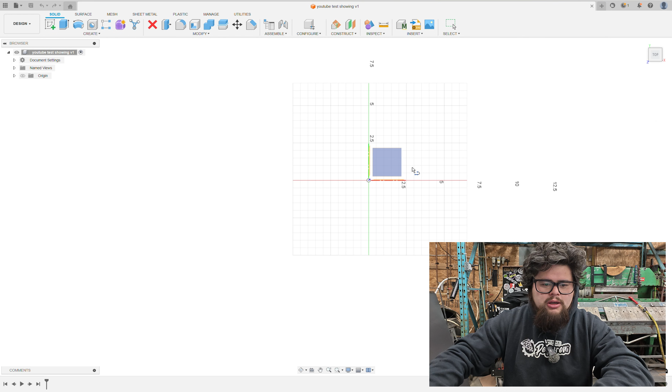Once we have this here, we're gonna just start drawing. Let's start with the basics. You have L, which is your line. That's a straight line, and I'll show you on the computer right now. We're gonna press L, choose the plane you're gonna be working with. Like I said, the top is here, so we're going here. You press L, that's your line tool.

Press it one click, bring it to wherever you want it to go, and press it again, and now you have your line. If you want to dimension the line, you press D. D stands for dimension, because we're dimensioning it. Press D, or go to the top left here and click Sketch Dimension. All the hotkeys or shortcuts I mention are available at the top here. I just use the letter because it's a lot easier.

We're going to press the sketch dimension in the top left corner here, press it on the line. Right now it's 8.45748 inches long. We're just going to make that 5 inches. So you just press 5 and enter, and there it is.

If you have two measurements you don't want to add up, or you want to divide it by 2, you can also put that sequence in the dimension box, which I'll show you right now. You just double click the line you had.

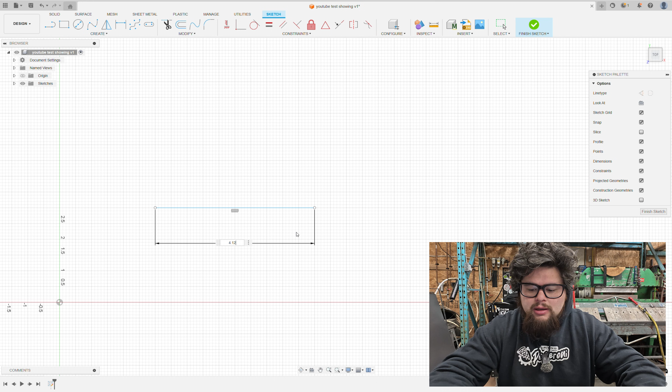You don't have to be in the sketch dimension program. You could just double click the dimension itself, and now it will show up. So if you have two numbers that you don't know what they equal up to, like even in decimals, let's just give an example. We'll go 4.129, and then you just put plus 1.675. So now you get 5.804, and we didn't need to do any external math. You just have two dimensions together, and that adds that.

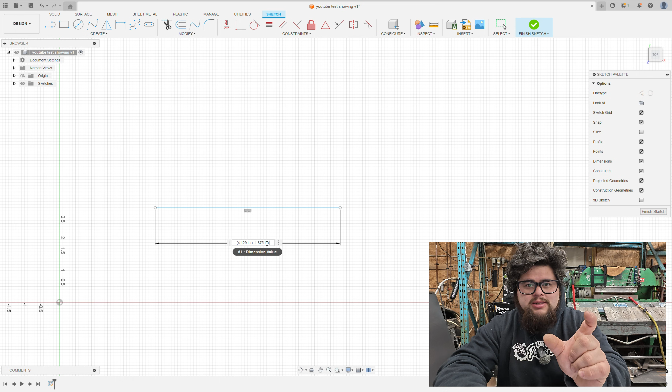We can do it the opposite way too. If we want to cut this in half, you have to know your BEDMAS: your brackets, exponents, division, multiplication, and then your add and subtract. So if you put these two in brackets, that will take that sequence, and then if you divide it by 2, you'll get your half of that, which is really cool to use in a lot of situations, especially if you're adding up a bunch of small numbers. So now we have 2.902, but we're just going to keep this at 5 for now. That doesn't matter.

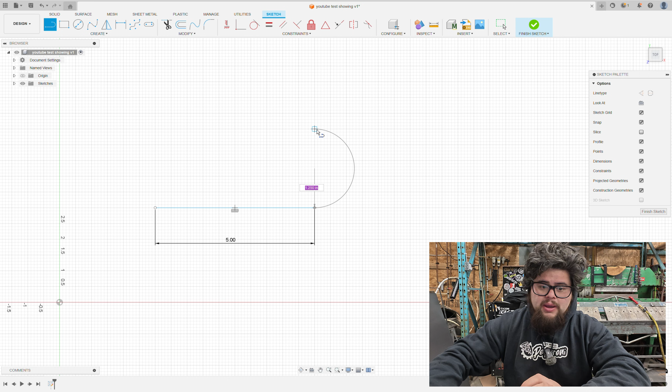So with the line tool as well, press L or at the top left, you'll see line. If you're on a straight line like here, if you hold the left click of the mouse, you can actually do a tangent arc off of that to wherever you want to go. So here you go here, or you can actually do a whole 180 loop. You can even go straight. But that allows you to make a really nice arc that is tangent or in line with the lower line that you go off of.

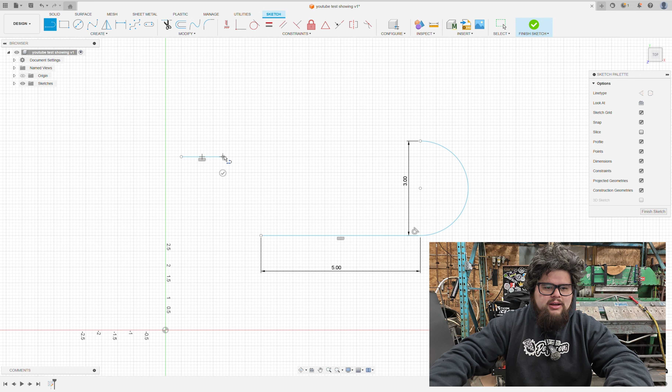So from there, you can dimension that again. You can just click the top. You can click the bottom. So right now we're at 2.5. Let's make it 3. It'll actually automatically recurve the back and give you a tangent connection, and make the arc 3" like you guys saw there. So that's a really cool tool. You can go around as much as you want. You just need a straight line to begin with. If you go there, you can draw whatever you want. It's super simple, super easy, super nice.

And then, zooming in here, oh, it doesn't want to do it right now. So say you go straight, and then right here, you can see that little box come out. When that box comes up, that means you're perpendicular, so you're exactly 90 degrees to the previous line that you did. So let's just delete this. Hopefully that helped you guys. So that's the line tool.

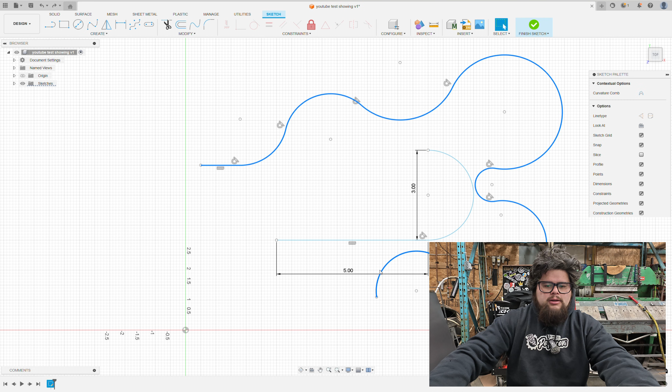So now if you want to do a rectangle box, there's 2 options. You can press R, and it's a regular 2-point rectangular box. You press 1 click, and you can drag and drop your box. You can do 5 by 8, and you can just change the dimensions. That's always going to be a 2-point square or rectangle, whatever you want. That kind of covers that.

Then there's a second option. I kind of have these as a preset, but if you press S, S is your shortcuts, where you can type in what you want and what you need. So right here, I have saved a center rectangle. The first one takes one corner and goes like that, whereas this rectangle starts from the center and then you just go out. So see how it has that little triangle at the top? And then we go to the side, the little triangle here. What that tells us is we're in the center of that line.

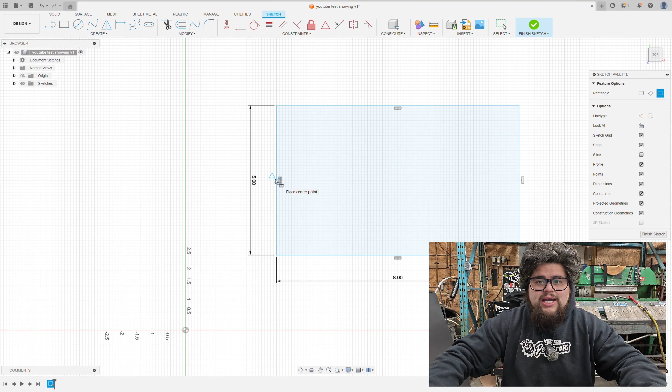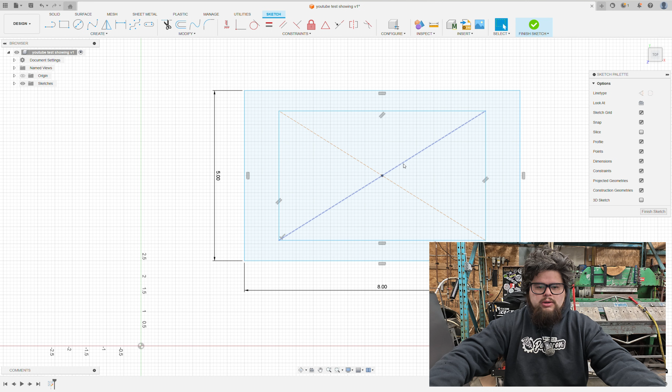So if we drag this over, see how it has the green line there? And then it matches up. So given those 2 coordinates, we are exactly in the center of this rectangle. That goes for all lines; it'll tell you the corresponding center points. So right there, we'll click, and we can just drag it around. We'll go 6 by 3.8 just for the sake of it. And now we have this center rectangle with 2 construction lines that I usually just delete because they're not needed. You could either right click it and press delete, or just press delete on your keyboard.

So right now we have this, so hopefully you guys followed along there. So next we'll get to circles. Circles are right here. The center diameter circle, you just press C or you press up here and you just literally place it and put exactly what you want. So let's just go a 1 inch here and a 1 inch here.

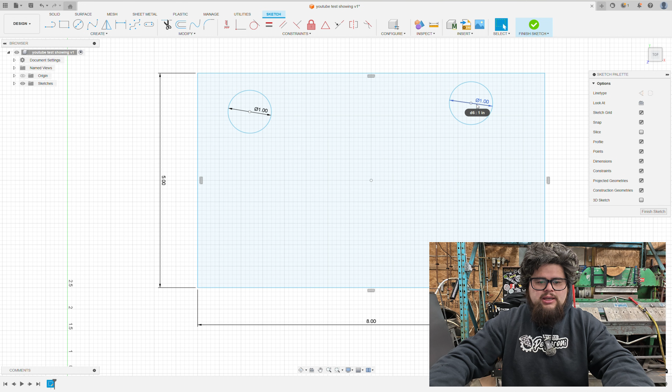So if you're drawing multiple circles and you want them to be all the same size, an easy way to go is if you just press C, you just randomly draw them everywhere. This is just for example, like roughly where you need them. Then you can go up to this tool here. It's called equal. So here's your constraints. So I'll go on about constraints at this moment.

Constraints are kind of what tells your sketch the limitations and constraints of what it needs to be. So depending on what constraints you have, tells the computer / program, hey, I can be here but not here. I can do this but not that. And there's several different ones that you can use, as you guys can see here. And I'll kind of go through them. So let's just go, we'll do the equal one first and then we'll set these up.

So equal here, if you press on this one here, the main one that we did, that's 1 inch, you press that to another one, there. I forgot to mention, when you equalize something, your object or sketch that you've drawn cannot have a dimension on it. So if there's a dimension on it, you literally just press it, press delete, and it's done.

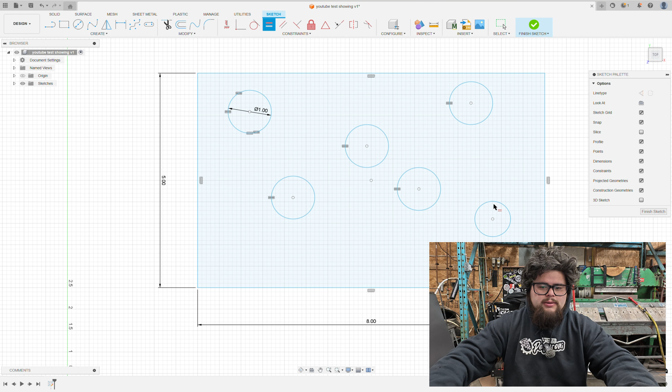So we'll go back to our equal. You press equal there, and we'll just go along to all the circles and match them up. And now whenever you change this main circle, say you want it like 0.75, all of them change. So that's a really cool thing to do. So now that we have that constraint done, you can see every double line here equals one of the holes here. So that's a really cool, easy thing to do. Let's go to the next thing.

So the next constraint we will go through is horizontal / vertical. So if you press this one and you press there, like if you press the circle, it will automatically go to the center. And a trick that I learned, that really helped me, is you can't really put it to any of these lines here, right? But if you press shift and you hover over, see how the center line starts now?

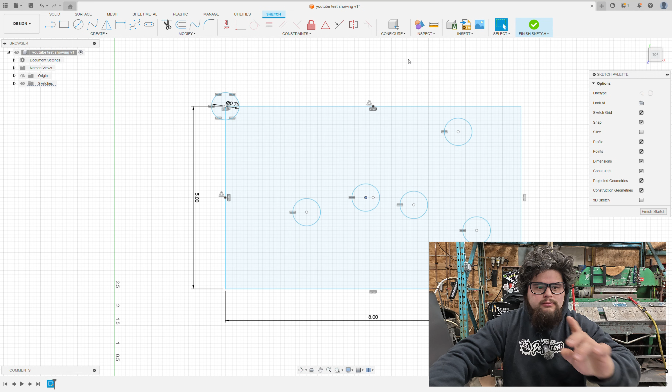So this constraint here, the vertical horizontal, we press the center there, and now we will go here and it will be on that line. And then if you go here to this one, it will move it to this corner. See that? But if it's closer to where it needs to be, it will take the point. This hole here was already up here, so it would cater to this line being a center. But if we go to this one here, to here, it will go to this side of it, like I just showed you guys. And it's already centered here, so it would just naturally be like that.

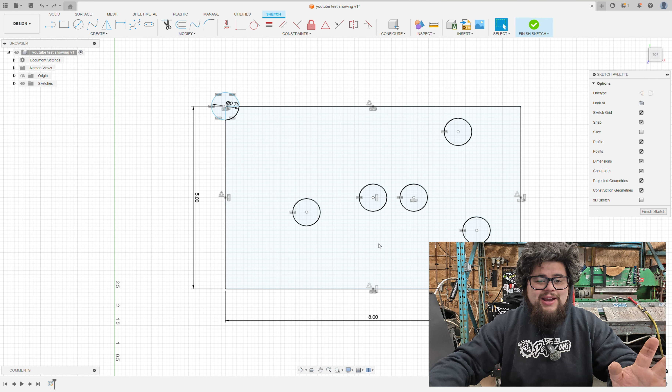So you kind of have to learn what you can get away with on what side, but once it's constrained, it's good. And say you do constrain something like this, and you want it over here, but you go here. No, that didn't work. Say you did it and you don't want that. Then all you have to do is press Control Z or undo, and it just goes back a little bit to what you were doing and doesn't break everything. It literally just returns time a little bit and that's it. So that's what that constraint does. That one I use a lot.

The next one is coincident. Say this point you want on here, it just adds that. Or like I said, if you find the center of it, you press this to the center of that, and then to this hole, it just aligns your dots together. So that's what that one does. This tangent one here puts your edge to whatever line you want. So see how it's touching, and then you can move this along wherever, and it just has the edge touching all the time.

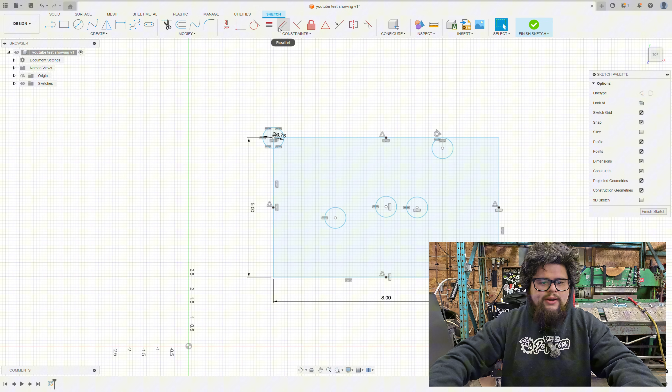Parallel lines is one where obviously if you click this one and this one, it's over constrained, so it won't work. But say we have two lines here, and that's not parallel, but we want it to be. You just press this parallel one on these two and it'll align them perfectly.

Another good one is the midpoint one. So if you want something on the midpoint of a line, you just press the midpoint. Say we take the circle over here and we want it on the midpoint of this one. You just press that and it gets you there and it just locks it in there. So those are pretty much the constraints that I use all the time. I don't really use the other ones, so I can't really tell you how they work.

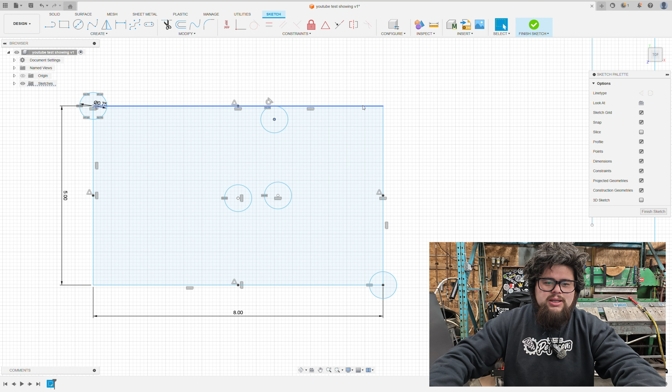The fix, actually, this is kind of a cheating one. This is one that I use all the time because I don't constrain enough. So see how this moves up and down. If you want to just move this left and right, but don't want to move this, just double click the rectangle, right click, and go down and press fix, unfix. What that does is just lock that one piece into place so it can't move. Doesn't matter what you do to it, you cannot move or modify it until you press unfix.

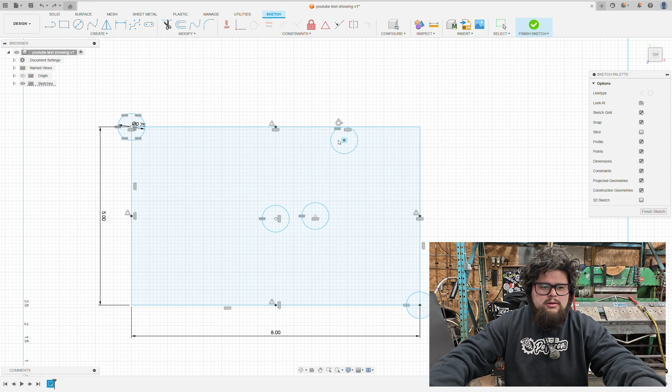So if you press that, see it turns a bit green. Now what you can do is just move. Oh, you should be able to. Oh, weird. Here, let's try that. Oh, at least two constraints now. Let's try a new one. We'll put this on that line. Oh, why aren't you? Weird. Huh. Sometimes that works. Sometimes you can just constrain it. Might be able to just do this single one. See how just that single line is?

There we go. I just pressed fix on this bottom line, and now I can move this around and not have to worry. And see how it always stays on that line. And then once you're done, just right click it, unfix, and then that just stays where it is. So that's kind of all that stuff.

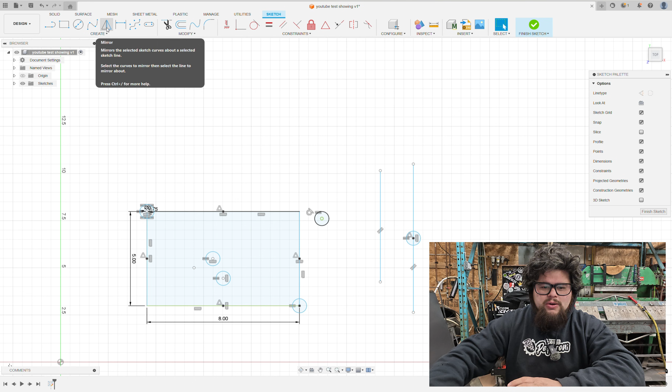So what we'll do next is, we've done the circle, we've done the fit point spline. That's not really necessary for simple stuff. The mirror. Another thing that I use lots is the mirror function. Super easy. All you do is press it. You kind of just scan over what you want to mirror. Then you press your mirror line right here, and then it shows up on the other side like that. I do that with a lot of drawings. You just draw half of it, then mirror it. You have to connect the two lines where it intersects, which is kind of annoying sometimes.

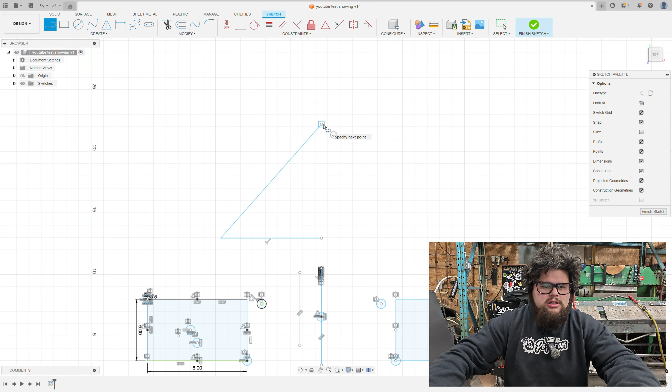So let's just draw a triangle, let's say. Like right there. Say you want this to mirror. You select the objects, these two lines, select the mirror line right here, and then you press OK. So right here, see how this is white? There's a little white dot here. If you export this with a white dot there and bring it into a CAD program to do your drawing for your CNC table, this is gonna have two broken lines there, with a start and stop, and it's not gonna be fun.

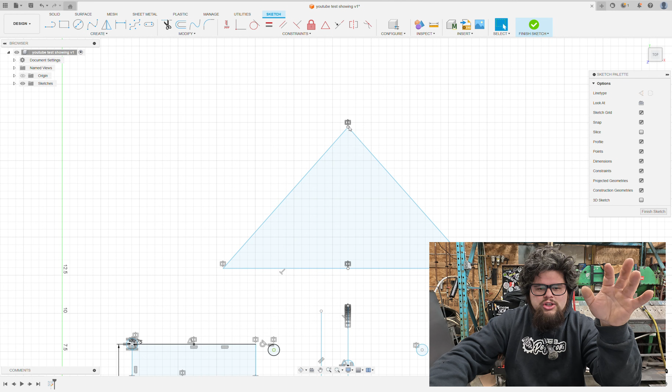So when I'm mirroring something like this, you can just go over it, press it with your left button until it's green, and that's connected there. But on straight lines, I'll just delete both, get my line tool, go from this corner to this corner, and it's done. It's just way simpler than trying to connect that little line, and then there's one more node that your computer has to read, so I like to simplify it. Once it goes blue like that in Fusion, that means that's a complete solid structure. All the lines are connected. So that's good.

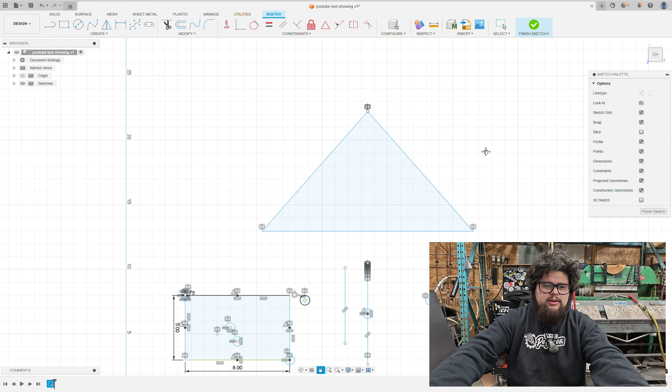So now that we have the triangle there, another tool that I regularly use is the fillet tool, or the "fillet" tool, I always used to say because it's funny. So what this does is this fillets your corners. I guess that's the easiest way to say it. So you just pick what corner you want, from this one to this one, or this one to this one, and then you just write your radius in.

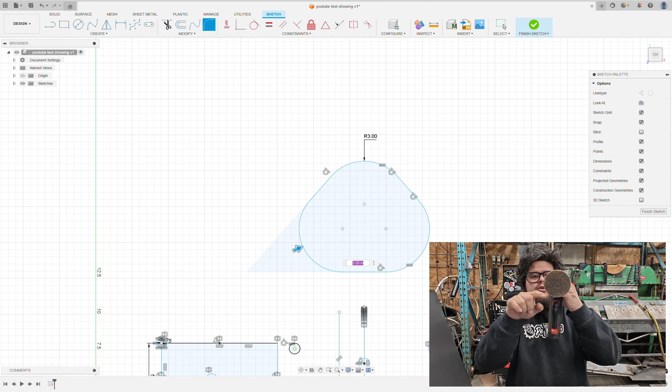So remember your radius, if you guys should know, but if you don't know, it's just half your diameter. So if you want like a 2-inch diameter, pretend putting a 2-inch circle like this on the corner, this is 3-inch. So, I mean, it might be 2.5. So you can do 1 3/4 to have this diameter, which you guys will see here. So if you go 1.75, you'll get that, and you can just modify it, go 1 inch there, and kind of go from there.

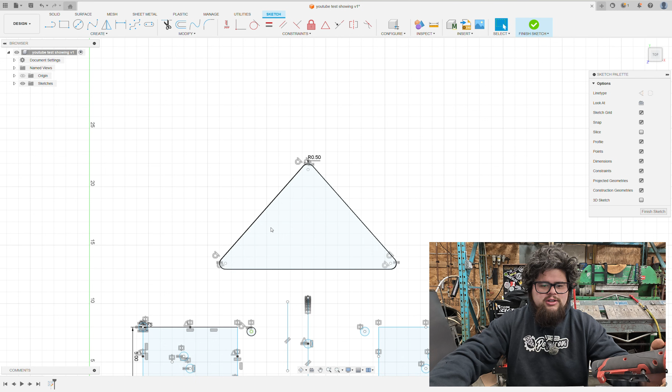I usually do like 0.25. That's kind of a nice one. Or no, like 0.5 for this size, and there you go. It's that easy. You can do it on all different shapes, all different sizes. Here we're doing the square. If you want them different sizes, you just don't connect to that one and then just press it again. So I'm just gonna press Control Z. That's gonna undo it, and then we can make these lines whatever.

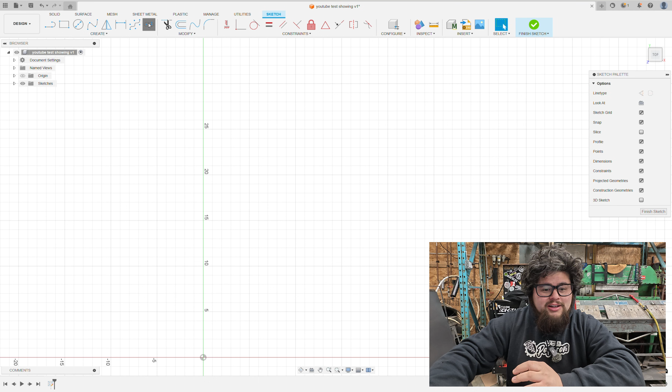Another thing we can do, there's so many things in here, but I'm just trying to cover the basics. If we go right here, here's the center to center slot. I use these a lot. So you just press it, it's the top left there. It might be under Create, under Slot. You can do center to center. But here, I'll just go through all these ones quickly with you guys and explain what they do. So here's your normal line. Your rectangle, you have a 2-point rectangle, 3-point rectangle, or your center rectangle. That's what I was showing you guys before.

Circle, you could do inner diameter, tangent, outer. You guys can see all of them over here to the left. There's a lot of options. I always just use center diameter circle because that's the easiest. You don't have to guess half. Some of the programs, you do the circles with a radius. It's just a lot easier in Fusion where you just do the diameter. Oh, I want a 1.25 hole. Press 1.25, you're done. Here's the arcs I was talking about.

You have your 3-point arc. We'll just show you that one right now because we haven't gone through that one. So this one I use a lot. So you press one left click of your mouse. You go to how far you want it. You press another left click. And then you just go up and down to where you want your arc. It works really nice. You can align it there. You can go here. You can do just a subtle bit.

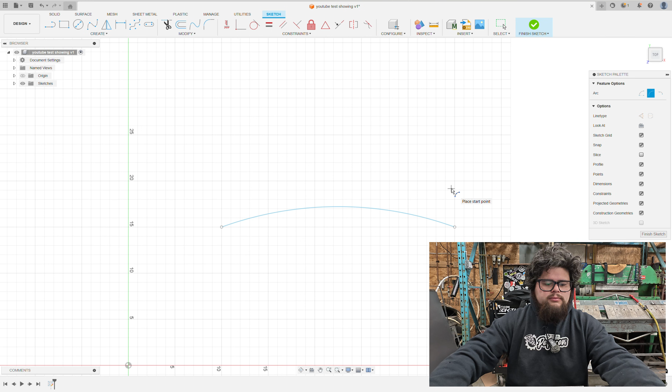It's not too bad. So I use this one a lot because sometimes you want a natural curve, but you don't want a diameter of a circle. So this is a super cool thing. So there's that one. And then you go to your polygons. Here your inscribed, your circumscribed, and your edge polygons. So for these ones, you just press it, you click, you pull out as far as you want it.

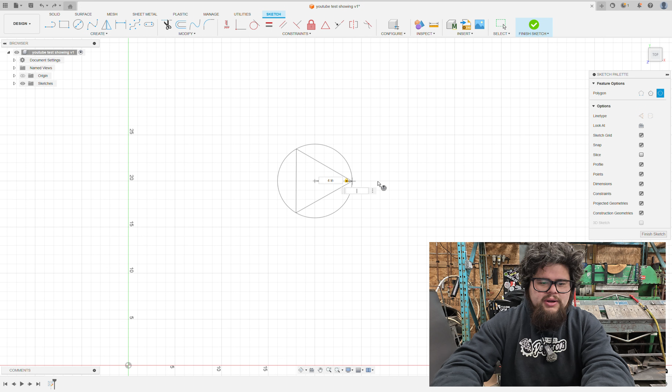So with this one, the outer points are what you set. So say you want it 4 inches wide and you want it to be a pentagon, you put 5. If you want to go 8, it can be an octagon. 9, a nonagon. Whatever one it is, you can, and then obviously a 3 is a triangle, but you guys will just draw a triangle. But yeah, so that one's super cool. If you do 4, it's a square. It just kind of senses what you want. And the pentagons are really cool in brackets and stuff. It's just nice to be able to not have a circle sometimes. So that's the pentagon one.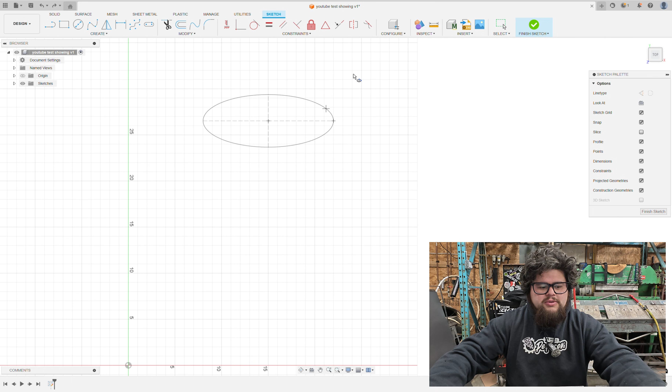This ellipse I don't really use. It's kind of like the slot tool, but it's like an oval. You would use it sometimes. I don't use it a lot, but I'm sure some of you guys will find a place to use it. Also super simple to use. The spline, don't really need that. And then the slot I showed you guys.

This pattern one is actually super cool. So say you have a square and you want to put a bunch of circles in it, what you would do is just draw your circle or your square. For this sake, let's draw a pentagon.

We'll go here, 2.25, and we'll make it a pentagon. So right now we have the pentagon. I don't know why it's not parallel. What we'll do is make this parallel to here. And now we have that.

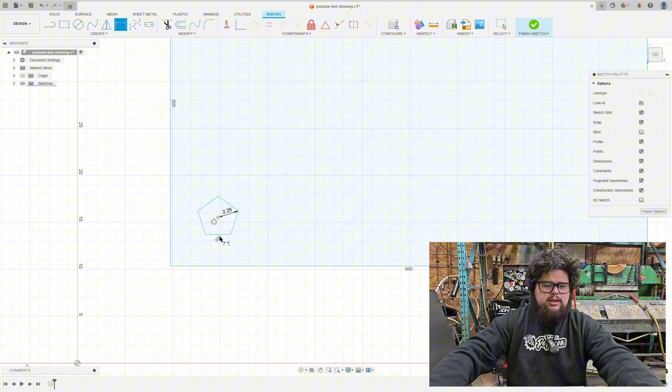So now that that's straight, we'll dimensionalize it from here to the center of there. We'll make it 5 inches. And from here to there, we'll make it 5 inches again. Because this just screwed up, if you look at this bottom line while I press Control Z, this bottom one here actually moved the bottom. So this is where your constraints come in.

So what you want to do is on these two here, you want to make that whatever it needs to be. What this does is allows this drawing here not to actually move the outer shape because it's constrained. So now we'll dimensionalize it again. Press D, the center to the edge. We'll go 5 inches and see how that moves the shape, not the outer square.

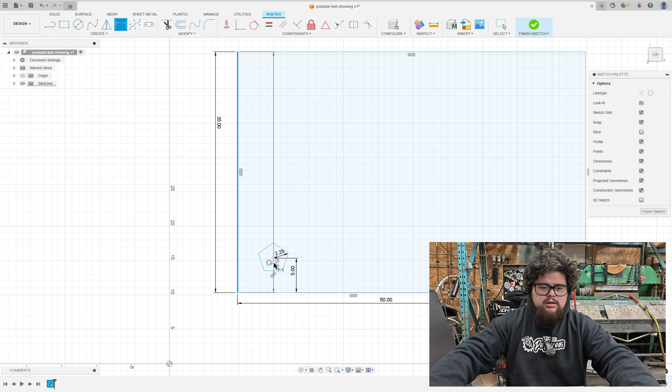And the outer moved, but it didn't make it smaller or anything. So how you could stop that as well, if we press Control Z, see how that moved? What you want to do is just lock this one in place. Press fix. So now that's locked in place. So then when we put this to 5 inches, it moves that. The outer square is locked in place. That won't move. And if you had a bunch of other stuff drawn, it would stay where it is.

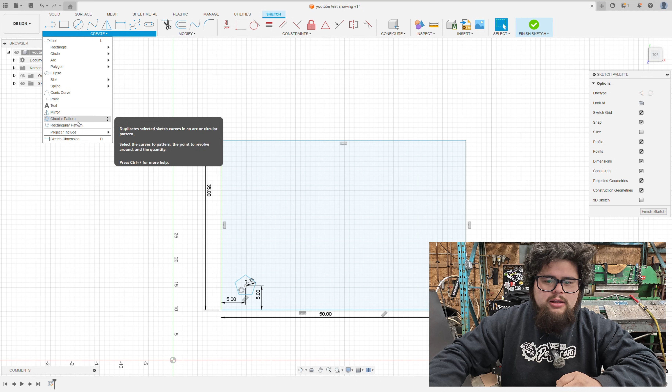So now we're going to go to rectangular pattern. We're going to click our polygon. You just double click it, it'll get all the lines. And then here, direction, distribution, quantity, distance, direction, and then this is for the second way. The distribution is the one thing that you want to pay attention to. Do you want the overall extension of your pattern, or do you want to determine the spacing? I like to do the spacing just because it's easier.

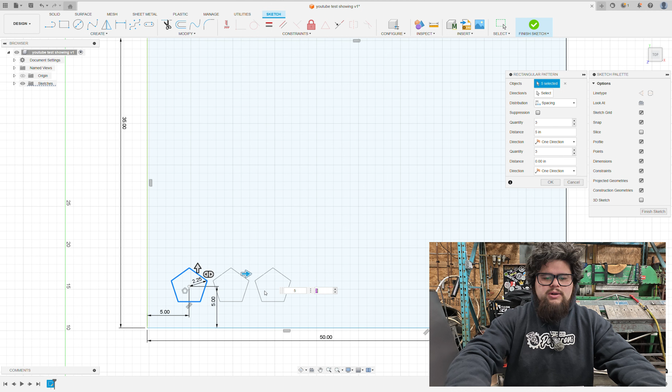We'll go like 3-inch spacing in between. That's center to center, remember. Let's go 5 just to make it easy. You press tab, you go to the next one. Let's do another 5, and then we have 5 here. I'll show you the other one.

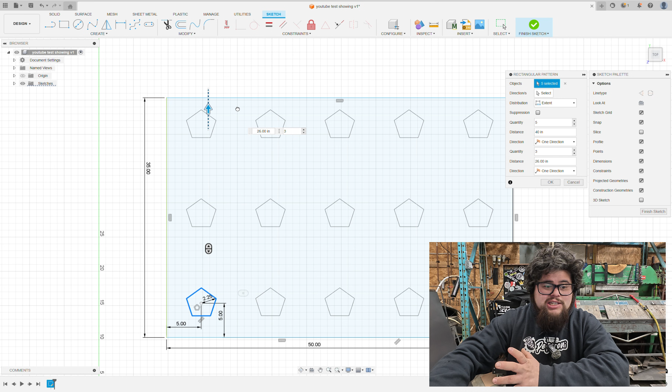Now we'll go to extent. We know that this is 50 and that's 5. So we're going to go 45 minus another 5, so 40 inches. If we go 40 here, we'll be even from the edge here to the edge here, if that makes sense. And then you just press this upper one. 35 minus 5 is going to be 30, minus another 5 is going to be 25. So we want this 25.

Let's go 5 again. And now we have all our polygons in the flat piece, and they're all an even pattern. I'll show you if you dimensionalize this line to the center of here. So you go there and then D to the edge, press shift to find the center.

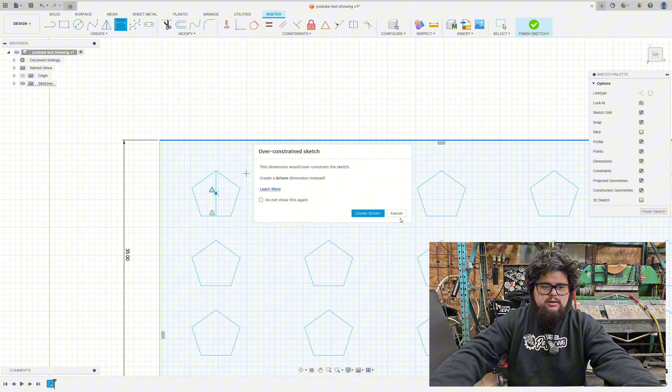Oh, that's a driven dimension, yeah. But you can see that that's going to be a bit less because from here to here, it's going to be a different measurement. So we're going to go from there.

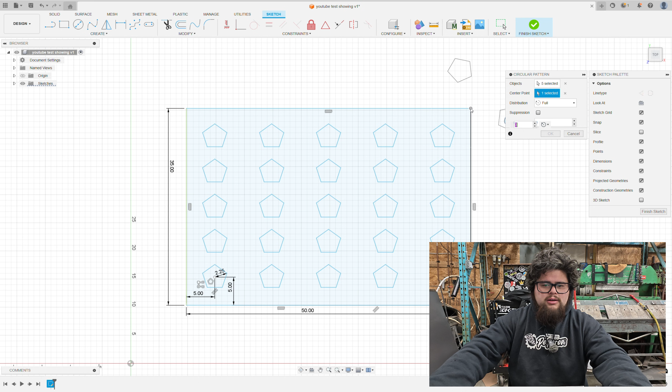So now that we have this, you can do the circular pattern as well. It's the same principle, but instead of a rectangle, it just goes around one center. So if we get this again, the center point we'll make here. We'll make a circle around there, and it's just easy to make objects in a circular pattern, so we're not going to worry about that.

Another thing that's very useful when making dies and stuff is this offset tool. So what we'll do here is we'll just draw a line here to there.

Go there. So say here's a die that you make. Super simple. You want this nice radius on some sort of hammer. What you would do is you would take the offset tool. You would just take the top line here. So you just want to press that line.

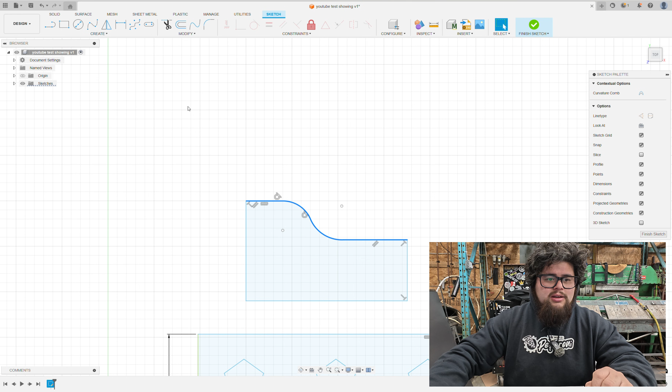You press Control. Control will allow you to grab other lines. So you get those till they're blue. That means those are selected. You press the offset tool. You go up the thickness in material that you want it to finally be. So let's say we're doing 16 gauge, which is 0.065. So you just type in 0.065

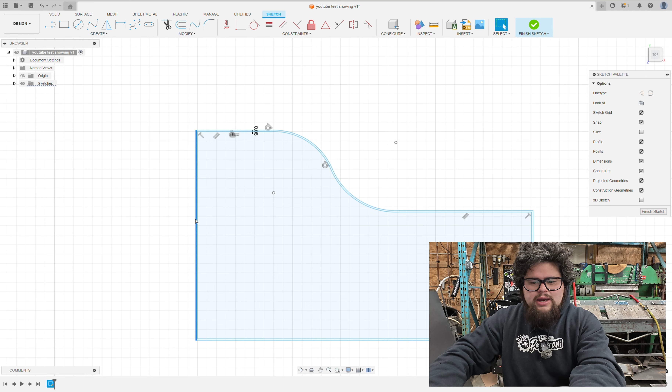minus. And right there is the thickness of 16 gauge. We probably want to give it just a bit more, because when you're hitting it, it's going to expand a little bit. So we'll go minus 0.080. So we'll give that 14 gauge. That'll give it some room to expand and stuff.

And then what you would do is just take this line here, continue on. And now, one of the main tools you're going to use all the time, and I didn't give it to you guys yet because we need it now, is the trim tool. So you just press T or this up here, the trim tool. You press that, and all it does is delete the lines that you're showing.

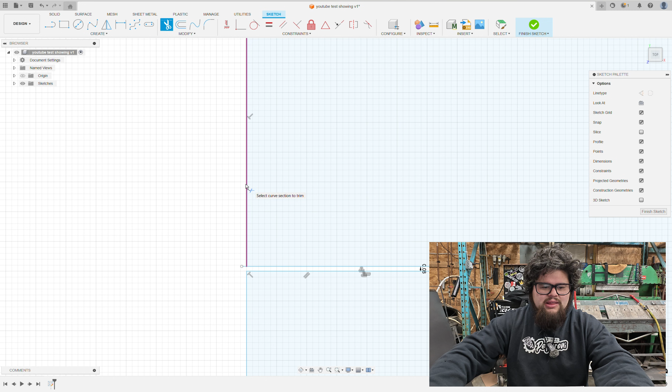You can see here, this one's connected here. So if we press on this line, it's going to delete only this one, but it's going to split it on this line, and vice versa. If we were to press this line, it would split it there. So we're just going to do this outside line there. And now this side over here. And now we kind of have this thing right here that would make that profile that you need, and go from there.

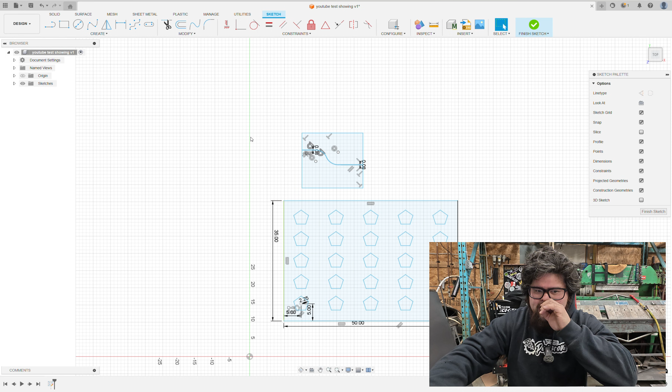So I think that kind of covers all of the tools that we need in order to draw most things in Fusion. I might go quickly right here and just show you guys how to do sheet metal stuff, and then I want to import a drawing or a picture and just draw over it to show you guys. We'll do the Roadster shock mounts and how I did it.

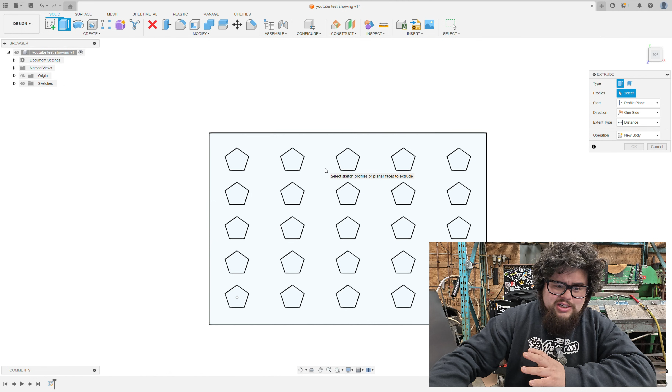So right now, this piece right here, say we want this piece out of sheet metal, you just press E, which is extrude. So this is how you can make your files big or small. You just press it. The thickness, say we want this 1/4 inch, you go 0.25, and that's it. You can even put 1/4 in as 1/4, and that would be good as well.

So here, you press Shift and the middle button on your mouse, and then you can kind of turn it a bit. Next thing, you want to go up to the top left here. You see sheet metal. These are all your sheet metal tools. So what it does is it converts the actual flat piece of metal into a theoretical piece of sheet metal, which will allow you to move it around like you would a piece of sheet metal in basic form. You're not going to be able to do big bulges and stuff, but just very basic bending you'll be able to do.

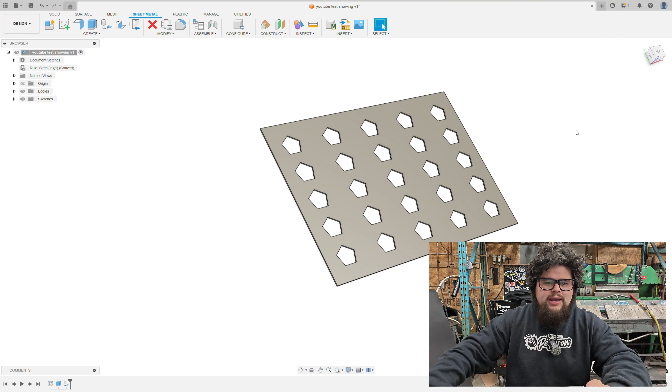So convert it to sheet metal. You do that. You press this. The thickness is 1/4 inch. Okay. So what that does is tell Fusion that this piece is now a piece of steel. And you can change it accordingly to make it aluminum, titanium, whatever steel you want, and it'll act differently when you bend it. So then we'll go right here. There's the bend tool, and then there's the flange tool.

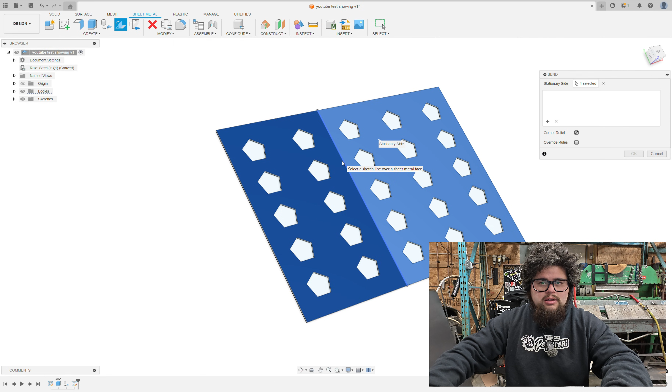A bend tool is when you already have a drawn up piece of plate like this, and say we drew a line in it, like say we want the bend right here. If we drew a line right there, there's a line there. So now if we went bend, you would click the whole thing, and then the piece you want bent, you press that side, and that will bend it 90. So you can do that to 2 corners.

The thing that sucks about using that tool is you can only do kind of one bend on the flat surface. So on a square like this, you can bend the 2 to 4 sides, but after that, all your drawing kind of becomes non-existent, so you don't have anything to work off. So say you draw this huge thing with 6 bends in it, you can only do the first bend off the main piece, and then go from there. So it kind of sucks in that way, if that makes sense.

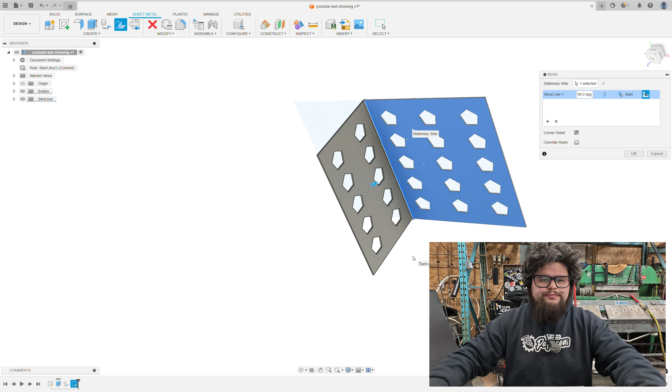So we're just going to cancel this. We're going to Control Z that. And what we're going to do is go back to sheet metal over here. We're going to press the flange tool. And the flange tool just allows you to take a bend off of wherever you want and make it as far as you want. And it cuts out the corner and stuff automatically for you, and that's how you have a box.

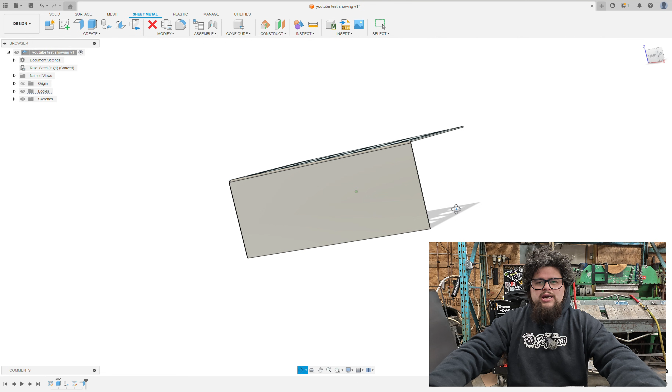From there, it gets very complicated after this. It can get. Say you want something on this side of the box or this side of the box, all you do is you take your normal sketch tools and tooling. So say you want 2 holes on the side of this piece here, you just press C. Instead of drawing on the plane, you just draw on that side of the box, and then you draw a couple circles, and then to make them in your workpiece, you just press E for the extrusion like we did previously.

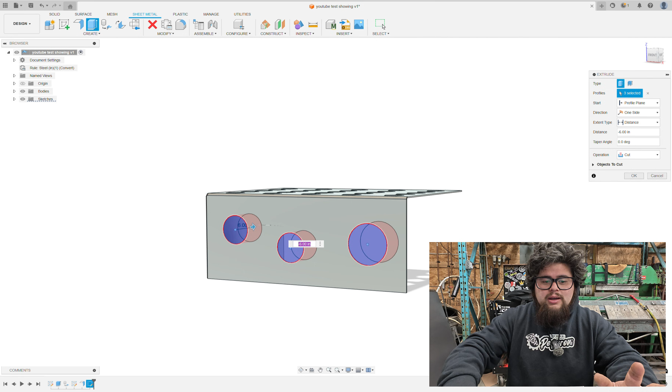You click the holes, and instead of making it thicker, you actually use those holes as a cutting device, and you just go backwards, and then you cut the holes out of it. So that makes that pretty easy. And we can go fully in depth on sheet metal tooling and everything, but I just wanted to show you guys with those simple things, you guys can do a lot with that.

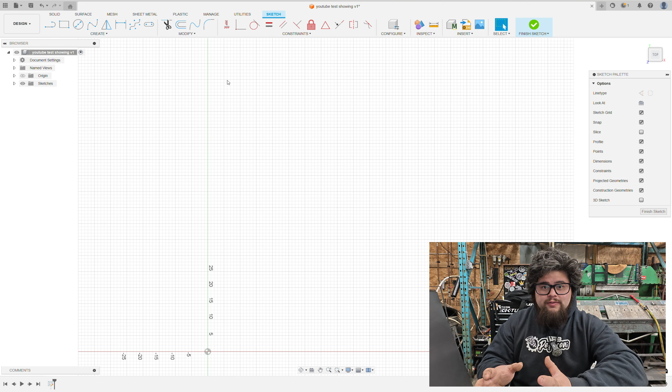So we're just gonna go backwards a bit and delete all this. And now the last thing I want to bring in is a photo and just draw over it, and show you guys how easy it is to take something that you've drawn in real life, take a picture of it with your phone, email it to yourself or whatever, and bring it into Fusion and draw it.

So we're gonna go to Canvas up here. You're gonna put it on Insert from My Computer. We're gonna go to Pictures, or Downloads, I think. Where's that bracket? Let's go this one right here. On the top, and OK. Oh, this is just like a piece of, we'll just do this. This is easier. So see how I have the tape measure there?

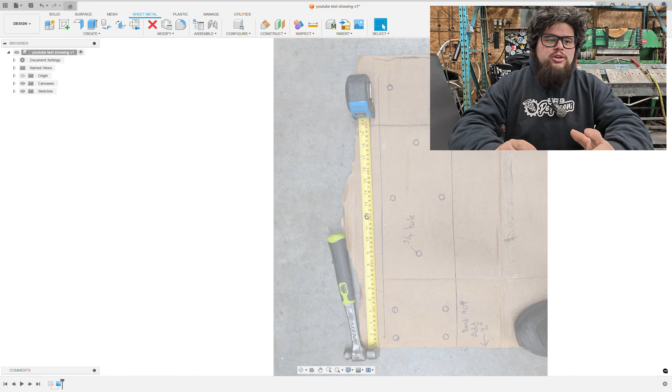You're always going to want to take a picture of your tape measure with the object that you're taking a picture of, because it will allow you to do what we're doing at this moment, which is calibrate your picture to the actual computer. So you're going to want to go to Canvases, go Calibrate. I usually like to have this like this. Why is this working like this? Sorry, guys. I usually take 2 points, so I'll go from like the 2-inch to the 14-inch.

Let's go 15-inch, because the longer you do, the better. And then we know that distance in between there is 13 inches. So you just press 13. Let it load. We'll back up. And now this object here is actually calibrated, so we can just work off of it like we would normally do. This last portion, it just stopped screen recording, so I'm gonna have to do it again.

So now that we have this calibrated and set up to where we want it, we're just gonna draw it up quickly and to the dimensions that it theoretically should be. If you have specific dimensions, you can obviously plug them in, but on a plate like this for a construction site, the lines will probably be on a full number, or like a 3/4, half, or 3/8. So we'll draw them to the actual holes on the actual sheet, and then we'll spread them out according to what 99% of the chance it would be, unless given specialized orders.

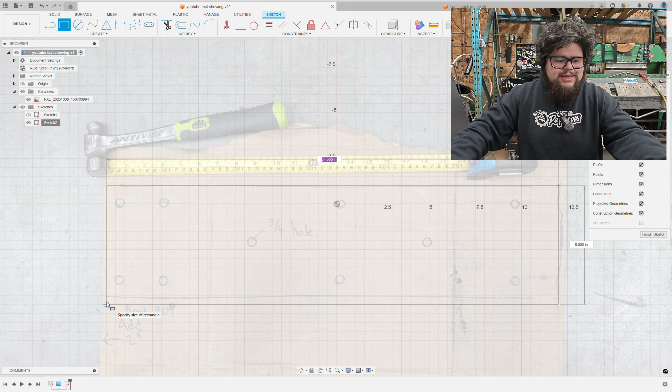So we're just gonna press R for a rectangle. We're gonna come up on this corner here and just drag it on by. It's gonna be 24.5 by 6.5. You can see here how the lines are a bit off. The piece was overall a 6, but when they cut on the line, the actual kerf width of the plasma or whatever they had it cut from took up that space. And when you draw a Sharpie on here, you know there's going to be a space in between it.

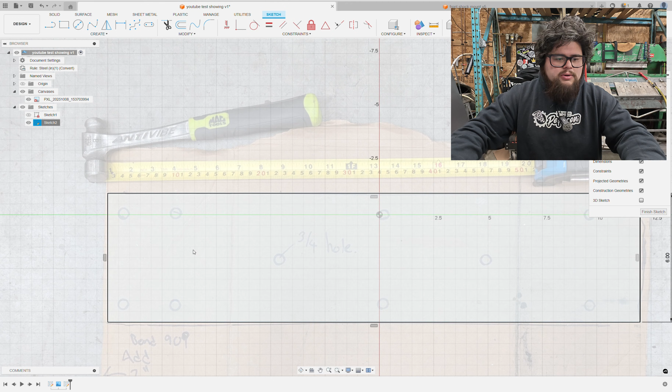I talked to the dude and he said it was 6 inches. So that's what we're going to do. So here, we're just going to do our circles. We're going to put like random circles. We'll go here.

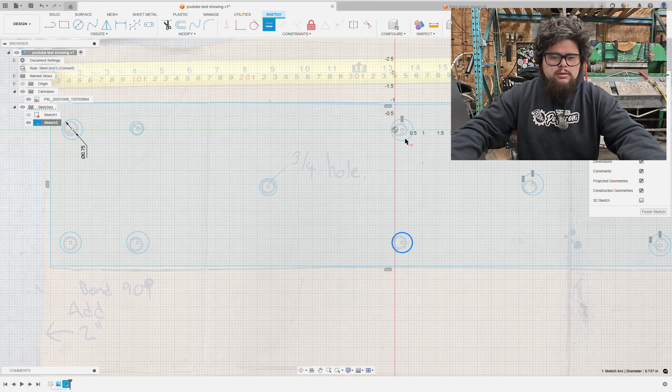We have our circles now, and now what we're going to do is dimension this single one. It's going to be 0.75 because it says 3/4 hole there. And what we're going to do is go to our equal up here in our tool section. We're just going to equal all of them together. So now as long as one is equal to another, they're all going to be equal. So now they're all 3/4 of an inch,

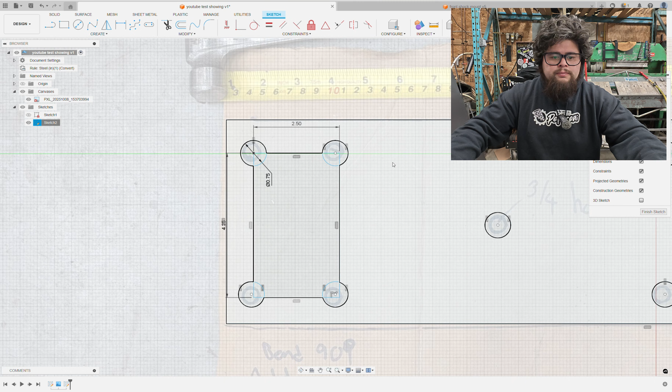and we're going to start laying out a center line on the actual piece. And then we're gonna kind of go where these are. So what I usually do for a 4-piece like this, I'm gonna just press R. I'm gonna go from this one and kind of go, okay, we know these are 2.5 apart, and these are gonna be 4.25 distance.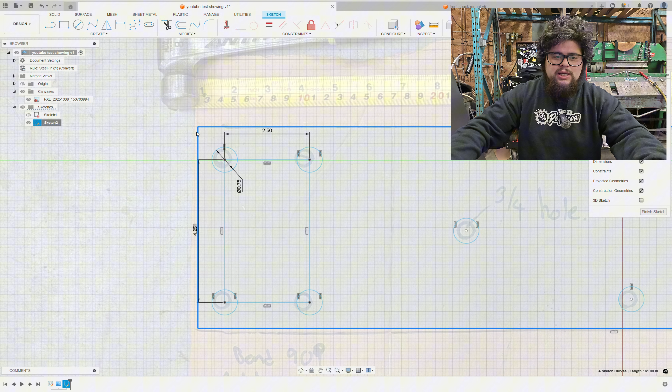So now that we have that drawn up, what we're gonna do is just take our centers of our circles and just drag it to the corner. Once it goes green, you know it's locked in. So here, lock it in, lock it in. Now we know that's perfect. So we know this outside portion is here to stay. So we're gonna double click, we're gonna press the fix. Now that is gonna stay, and everything that we constrain is gonna move around the actual piece of steel or the rectangle that we have.

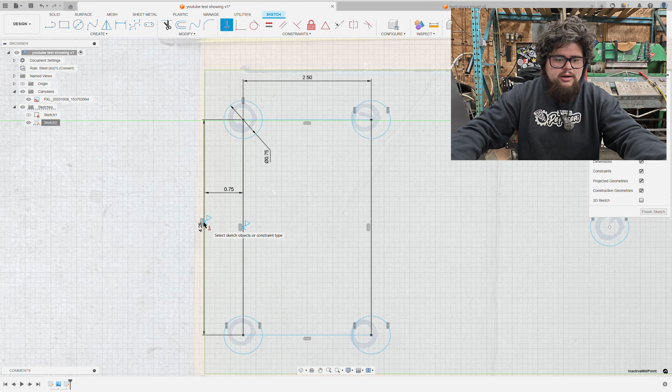So we're just gonna do this center line to here. We're gonna press D, go from here to here. We're gonna make that 0.75 because it's 0.79, you kind of see. So we want it 3/4 of an inch from the edge, and then we're gonna go to the horizontal and vertical tool. You see how the center isn't showing, but once you press shift, see that center line. So we're gonna go from there, and then on this outside here, we're gonna go there. So see how that moved? Now this here is aligned with each other.

I'm trying to move my hands to show you on the screen, but I have to use my mouse.

So then we'll go from this hole here, this one, we'll do the same thing. We'll constrain it to the center of there. This one will go to there. And that's about there. So now we know all these are centered. We just have to find our distances away from the edge. So we'll go from the edge to there. We're gonna call that 8 inches just because it's gonna be around there.

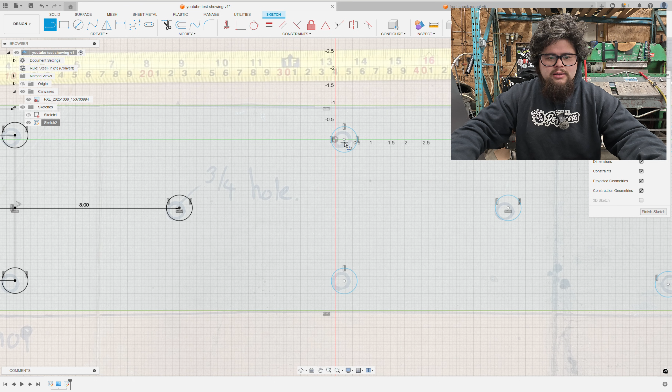We're gonna wanna draw a line between these two right there. Then, see that constraint there? That tells us we're parallel with here, so we don't have to know if these are on an angle or anything. Then from here, we're gonna press D. We're gonna go from this to this line. We're gonna say 11.75 because it's 11.73. This hole here to the edge is gonna be 7.25, I wanna say. Maybe 7. 7's probably better.

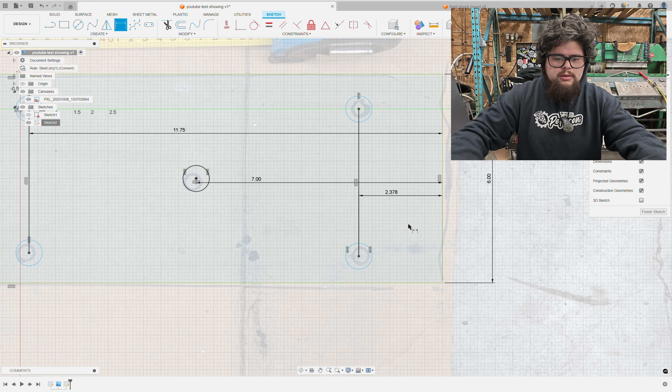And then these two, we're gonna draw another line. And we're gonna go from here to here. And that's where I'm gonna be, oh, damn it, 2.375. So that'll be 3/8 from the edge.

So this line here, we're gonna wanna press X. That turns it into a construction line. And what a construction line does is, when you extrude it, like we'll do in a couple seconds here to convert it to sheet metal, it won't disrupt any of the other things, and it'll just take out the pieces that are the blue line.

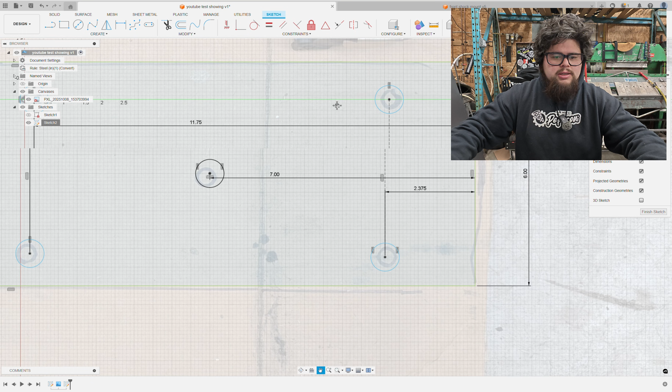One thing I forgot to do is we have to take this one, we'll go to center here, and to here. I don't think this one, there. It didn't look centered, so there we go. So now that we got this all pretty much done, I'm pretty sure this one's centered. Oh, it wasn't, so there we go. Now that this is all done, we'll take that, and then that. Oh, that's just dimension, so that doesn't matter. We'll go finish sketch up here.

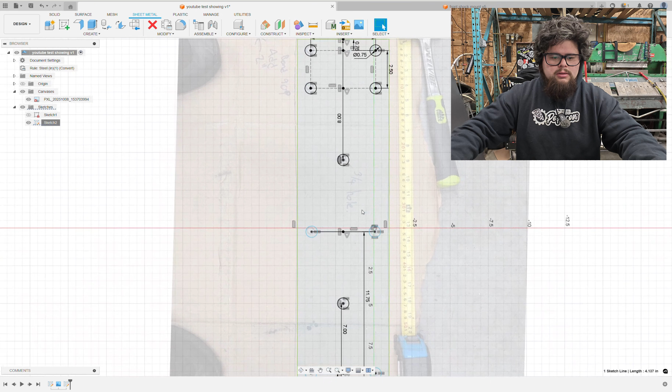There, that's a construction line. We're gonna press E. We're gonna extrude this to 0.25 and go like that. So there's our piece.

Now, if you guys have been watching till the end here, this is kind of a way to get around Fusion with not having to pay for it. So like pay for DXF files. So DXF files are part of the paid program, as far as my knowledge goes, where if you pay for it, you can just normally export them. Like if you go here, export, you guys won't have a DXF file.

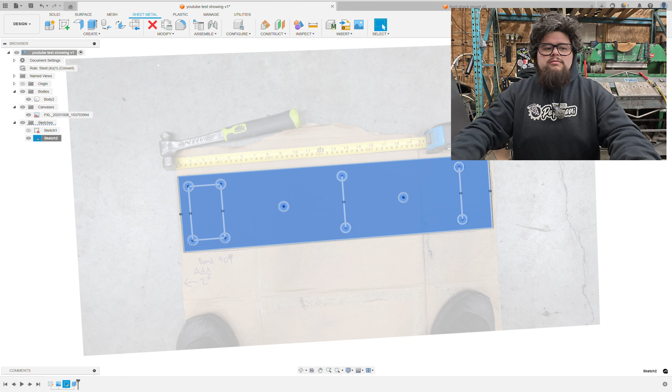But if you go over to the left to the sketches, you right click it, you're able to export it actually as a DXF. You're able to do all the points and everything and go from there. So that's a real good trick. Not a lot of people know. So if you have Fusion as a hobbyist and you don't have to pay, that kind of makes it worthwhile, you know?

The other way to export, if you do pay for it, now that this is like that, we'll have to convert it to sheet metal, go like that, and then you go create flat pattern, take the flat pattern, you go like that, and now that's there. And then you just would export it normally. Another good thing about doing the flat pattern way, but I don't think you guys will be able to if you guys are on the free one, or maybe not export it. I'm not totally sure though. I haven't had the free one in years.

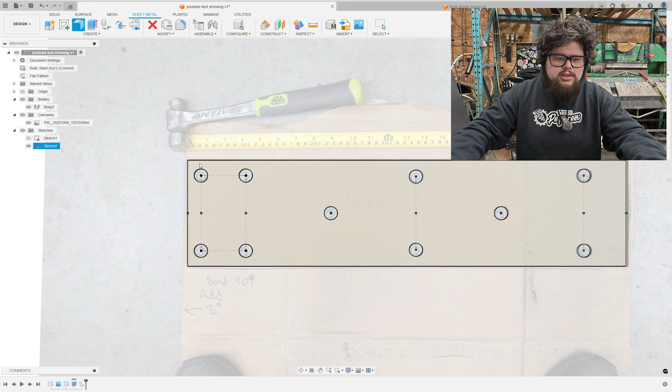You go do your flanges. If you make 2 flanges on this, let's just say we need like a corner flange. You go here and here. You want to go 1/2 inch, 1 inch. Let's go 5 inches. A 5-inch flange there. What you'll do is when you go create flat pattern, you just press the side that you want it to flatten out to stay stationary. You go update, yes, that's fine.

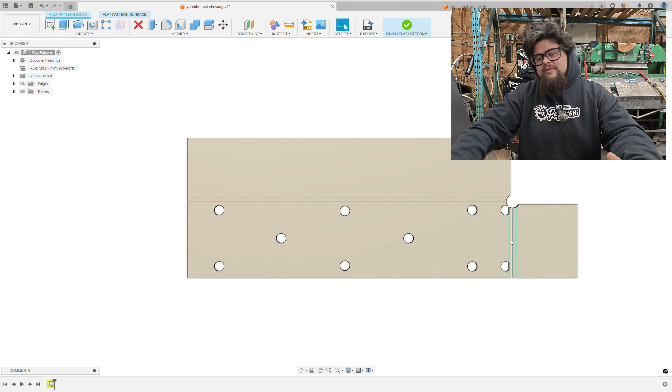And now what it will do, it will include all your bend lines that you need necessarily for the CNC benders and stuff, knowing that, hey, these are my parameters, I have to bend it there. What it will also tell you is when stuff doesn't work. So you literally couldn't do this bend on this side because it's going to interrupt that hole. So what you could do is go here, edit, delete edge 2.

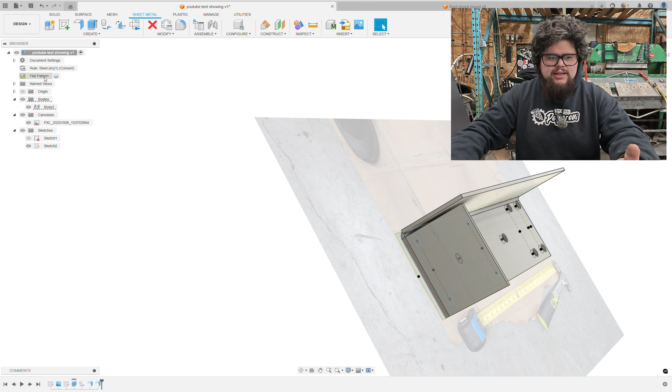No. Delete edge 1. Delete edge 1, delete. And now we'll have to do it on this side to know that we're able to. If you just press the top of your piece, it'll just go up to that far. But this is like, I wouldn't call this basic anymore. So flat pattern, now that clearance is there, and okay, cool, this will work on this side.

One more thing in Fusion is nice, so say you want to put a bunch of holes on the side of this piece, all you would do is instead of choosing a plane, like so say do C, instead of choosing the plane of the floor, you just choose that actual panel that you're working on. We'll just draw a bunch of circles just for proof of concept.

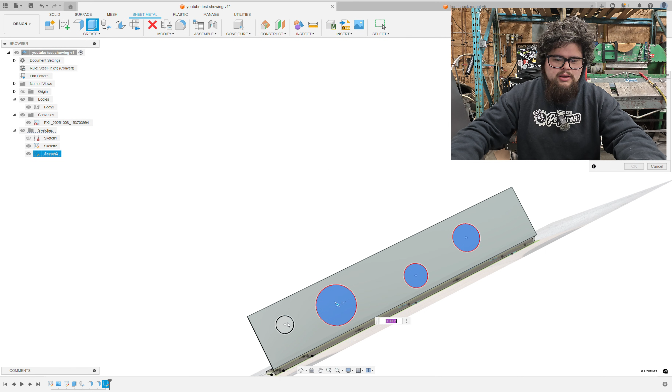There. Now once you have your circles drawn, you press E, you click on them, and now remember before how we made the pieces thicker, you just literally go the opposite way, and now whatever drawing you made, it's now a cutting device, and now you put those shapes into whatever piece you're doing. So

yeah, that is Fusion in a 50-minute nutshell. I hope you guys learned a lot. I hope this kind of showed you guys that it's really not that hard. It's pretty simple.

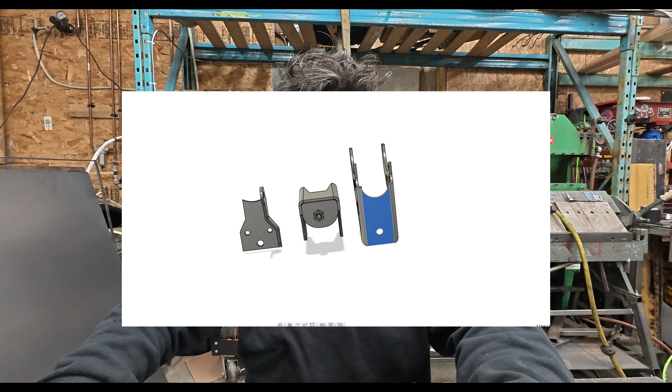I'll just show you guys quickly the front shock mounts in the Roadster. Here's what they look like on the computer when I was designing them. Like if you guys seen in the video, I fixed this one so that it doesn't hit everything, because it did. That's why I had to cut it in the video. If you guys want to check out the Roadster shock video, you guys will see what I did. And yeah, so here is what that looked like.